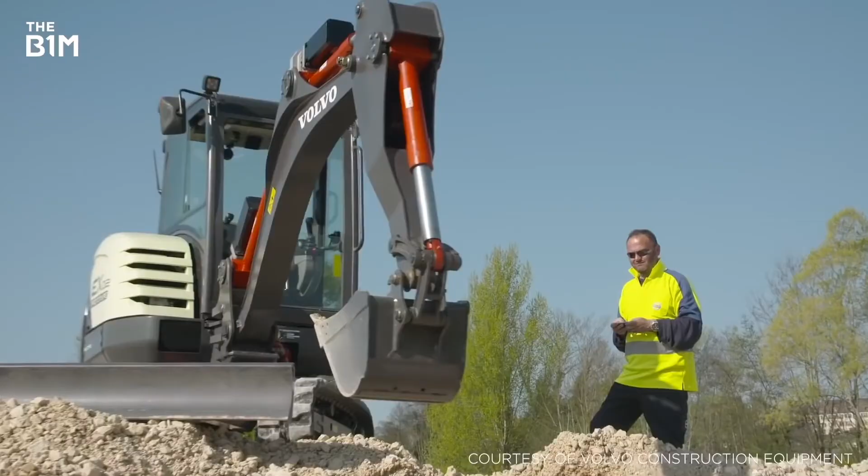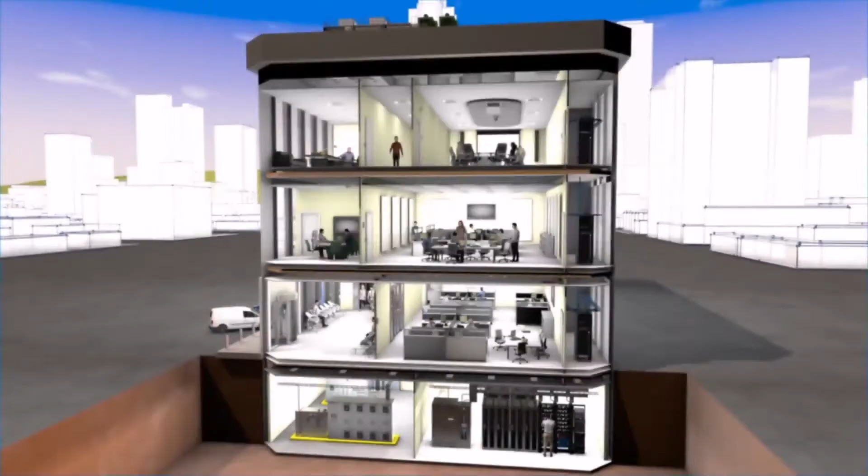Nowadays, digital technologies are changing the construction industry. The applications of technologies such as building information modeling, drones, laser scanners, and augmented reality are making the construction industry more and more data intensive. Also, evolving building systems, such as building automation systems, computerized maintenance management systems, and building energy management systems, are generating valuable data every day, every hour, or even every minute. With all this valuable data and machine learning techniques, we can uncover hidden insights and develop new knowledge for construction engineering and management.

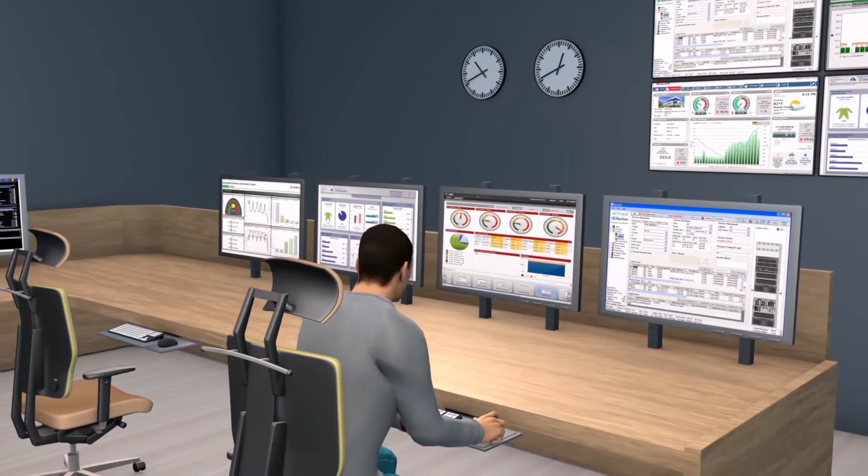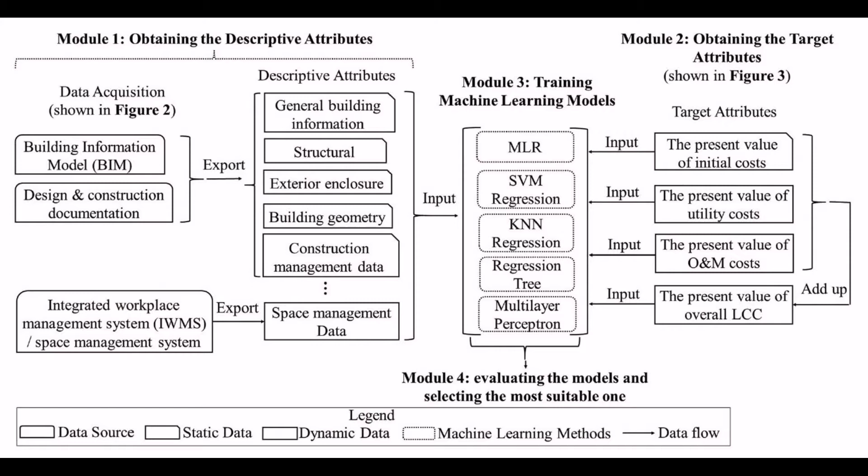One example of machine learning application in construction is a research study I conducted in the past 2 years. In this research, we investigated the feasibility of forecasting buildings' lifecycle costs by implementing machine learning on historical data. We proposed a comprehensive and generalizable framework for developing building lifecycle cost analysis machine learning models. This framework specifies the data requirements, methods, and expected results in each step of the model development process.

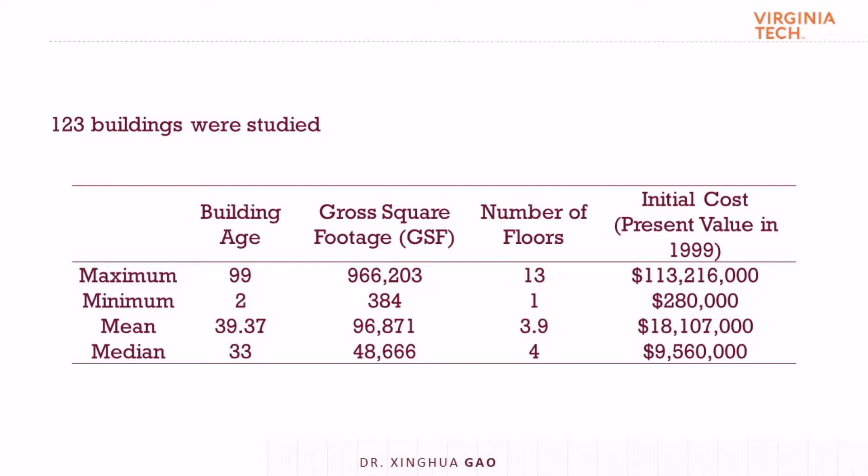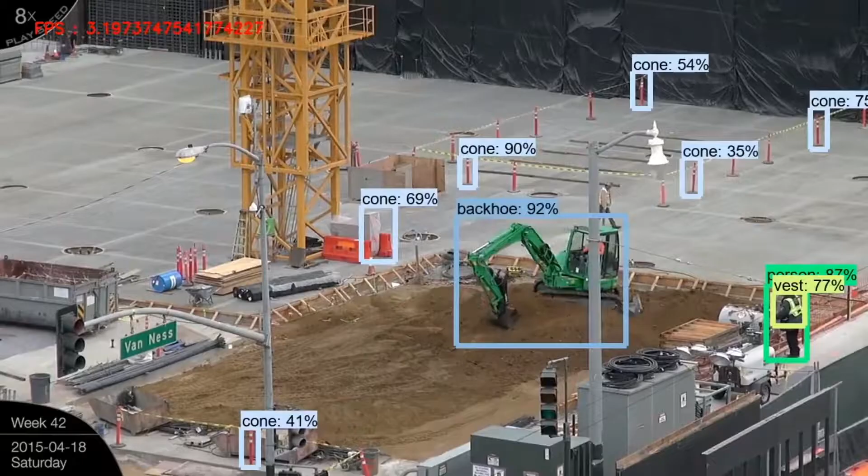We conducted a case study to test and evaluate the framework in a university. We collected the initial construction cost data, utility consumption data, and operation and maintenance data, and then developed a series of machine learning models based on this data to predict the lifecycle costs of existing buildings and new buildings of this university. There are many other applications of machine learning in construction. I would be more than happy to discuss them with you.

Another research I'm conducting is Internet of Things enabled and data-driven decision makings for the welfare of vulnerable population. Internet of Things, or IoT, is a system of interrelated computing devices, mechanical and digital machines, provided with the ability to transfer data over a network without requiring human-to-human or human-to-computer interaction. Examples of commercialized IoT devices in the building sector are the Google Home products and Amazon Alexa smart home products.

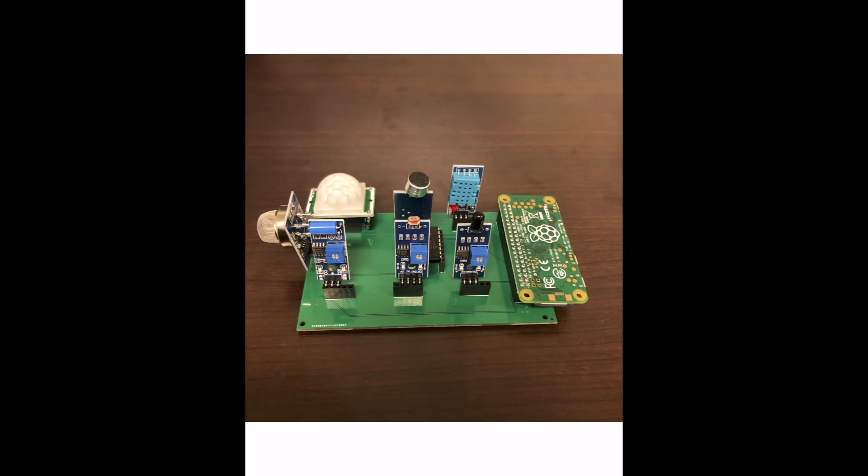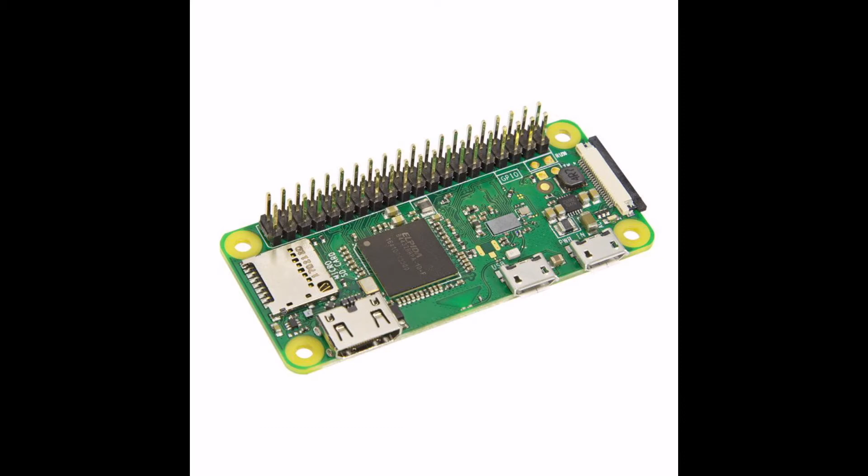Together with Dr. Na Meng at the Computer Science Department and Dr. Angelos Stavrou at the Electrical and Computer Engineering Department, I'm developing a low-cost, portable, and scalable IoT system for indoor environment sensing. I use the mini-computer Raspberry Pi as a distributed sensing station. It has a Linux-based operating system, independent CPU, memory, and Wi-Fi module. Installed with sensor modules, the Raspberry Pi stations can collect a lot of data, such as temperature, humidity, illumination, vibration, sound, motion, and all kinds of gas.

The data collected by these stations will be transferred through the internet and saved on a cloud-based central server. These real-time indoor environment data are the foundation for smart building research and applications. We can apply machine learning with this data and provide suggestions for decision making. For example, with the historical data, machine learning models can predict your preferred temperature at each time of the day.

When would you like to open the windows? When do you eat your breakfast? How can you lower your electricity bill by automatically turning off the Wi-Fi router when you don't need it? And most importantly, machine learning models may be able to find out what you should or should not do for better health, all based on your own data.

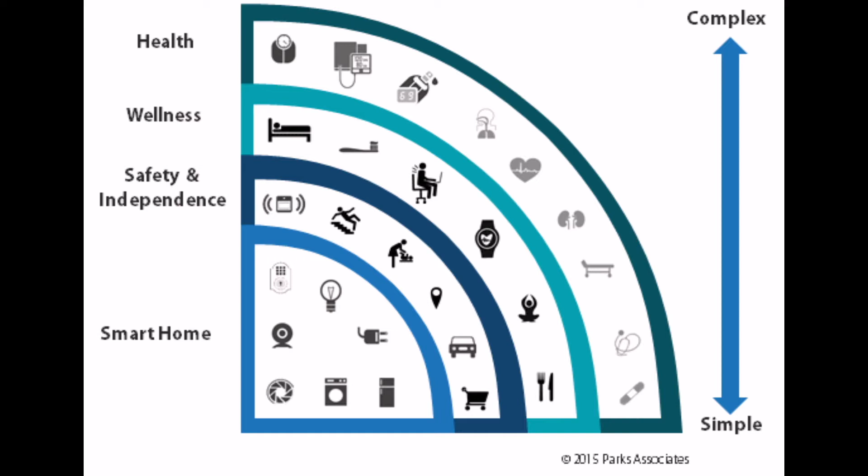Working with my colleagues at the Virginia Housing Research Center and the School of Building Construction, I'm conducting a series of research studies for improving the health and welfare of seniors using human building interaction methods with IoT and machine learning. We collect data that records how senior people interact with the buildings they live in and their preferences of building systems, and then analyze the data and try to identify the unique requirements of seniors.

In the near future, my research will extend to the domain of cyber-physical security for smart buildings. Because of the increasing amount of valuable data and automated analysis, smart buildings and their occupants are more and more exposed to the danger of data leaking, privacy invasion, and even physical stress caused by compromised cybersecurity. I'm currently conducting some preliminary research and building a team for this project.

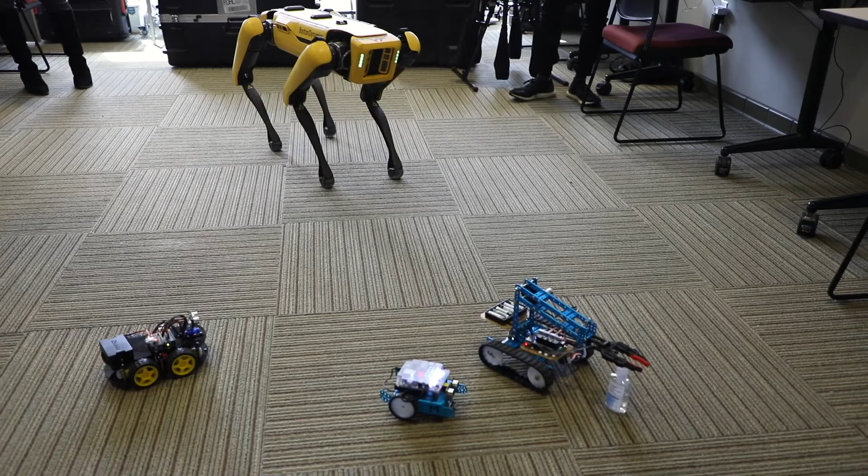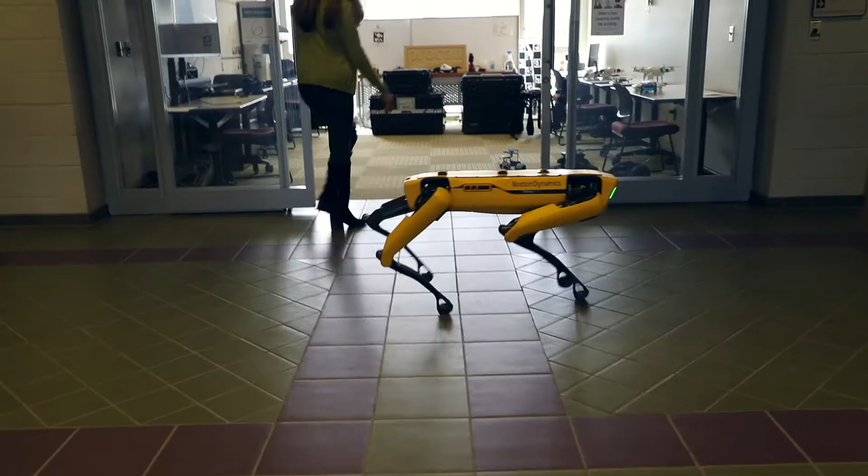My name is Kereshmeh Afsari, and I'm the Managing Director of the Arcade Lab. Arcade stands for Automation and Robotics in Construction and Design Engineering. I run the Arcade Lab with two of my colleagues, Dr. Nazila and Dr. Gao. We are focused on robotics and automation technologies in construction, as well as smart buildings and new technologies for education, new technologies for human safety and trainings.

We have a construction robotics team that is established through a fund from the Office of Undergraduate Research at Virginia Tech. The purpose of construction robotics is for undergraduate students to get involved with research during their education and get involved with new discoveries and technologies. Every undergraduate student in the Arcade Lab is paired with a senior student, like a graduate student, so that they can receive mentorship from the faculty as well as senior graduate students during their work in the lab.

My name is Mao Dong, and I'm a junior undergraduate international student majoring in construction engineering and management. Currently, I'm a member of the construction robotics team, and I'm working on robotics in construction education. Those robots on the table are the robots that I work with, and I use them to learn either coding or the autonomous feature of cars.

Hopefully I can apply them in construction education in the future. My goal is to determine whether they can be involved in construction education, and hopefully I can build a prototype in the next year.

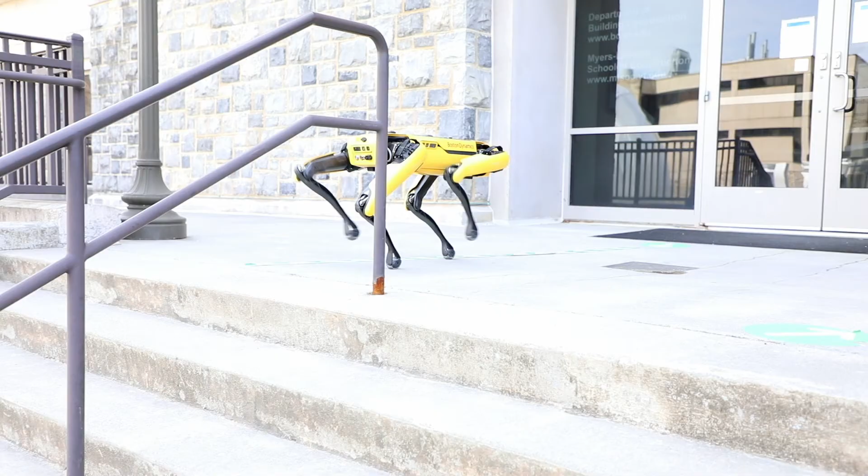Okay, I am now going to turn it over to Bola and let her talk about the research that she's doing. Thank you, and thank you for the opportunity to share my research with you. I will just briefly talk about my research work and what I'm doing. Okay, so I think I'm already sharing my screen.

My name is Omobolanle Ogunseju. You can call me Bola, and I'm a second year PhD student at the Myers Lawson School of Construction. My dissertation is on developing holographic learning environments where students in construction can learn how to use different sensing technologies like laser scanner, drone, IMU, RFID, GPS. Some of these sensors have been mentioned in the video you watched.

Although I work on some other research with my advisor, that includes robotics, testing the efficacy of exoskeletons for construction activities, digital twins, cyber physical systems for workforce training, and deep learning for learning, automating construction, and learning how the construction process is and how to automate construction processes.

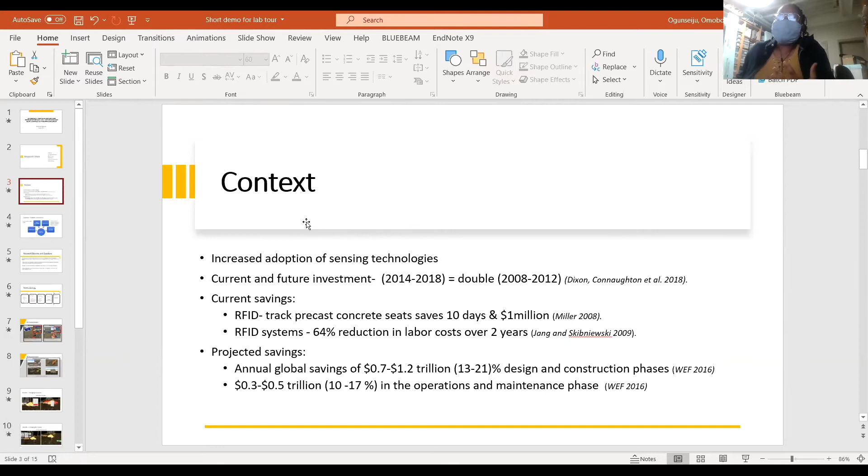Imagine using the RFID and saving about $1 million and 10 days. So this is actually triggering different institutions to incorporate sensing technologies into their curriculum.

However, most of these sensors are costly. For example, the laser scanner costs about $35,000 to $200,000, and most of the time, for students to learn how to use sensing technologies, they have to go to a job site. We know there are difficulties in taking students to the job site, like safety concerns—you have to wear safety glasses, helmet—and even schedule constraints. Sometimes the weather is not even good and conducive, and there are so many issues like that.

So why mixed reality? Mixed reality provides an affordable, hazard-free, shareable space. Students can learn how to use sensors right in the comfort of their classrooms. They can actually share knowledge together with their colleagues by working as a group, wearing the HoloLens, for example, or maybe wearing a VR headset.

It also helps to situate students in learning. There have been so many benefits that different studies have stated in literature. So this is just the objective of the research.

First of all, we wanted to know the core competencies—why sensing technologies are needed, and what is required to be taught to these students. For example, if you talk about laser scanners, what are the important concepts that students should learn and bring to the job site? That's the first objective.

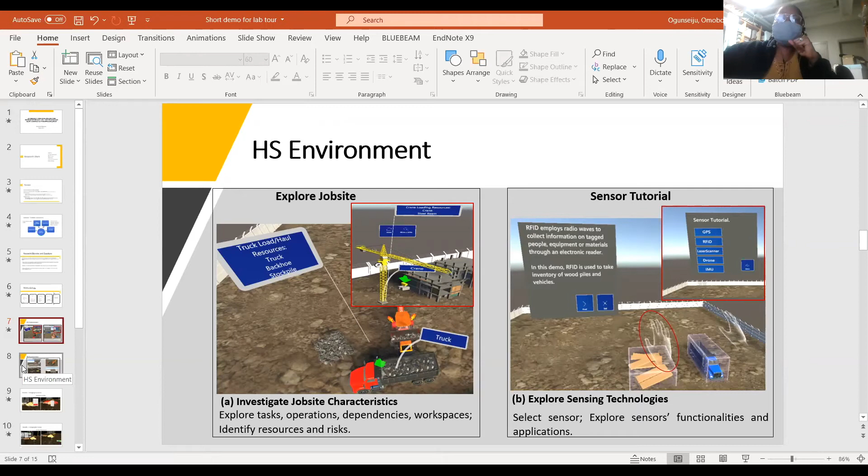In the sensor tutorial scene, we guide and scaffold their knowledge on how to use these different sensors. After they've been grounded in understanding different sensors, they go to the implementation scene, where they implement the sensors they've learned in this environment to track different construction issues.

For example, you can use the drone for job site inspection, or maybe for safety inspection, sanitation, or progress of work. You can use the GPS to track a dozer's productivity when backfilling. And another example is using the laser scanner to scan the existing conditions of a whole building for renovation purposes.

So we can see this is a whole building. They want to renovate it, but you really want to first get the plan of the building. Because the building is old, most of the time you may not have access to these plans. Even if you have access to it, things might have changed. The existing conditions might be different from what we had in the drawing when the building was built.

So these are different examples of how the different virtual sensors are implemented on the job site, on the construction site, in the mixed reality environment. Let me just quickly show you.

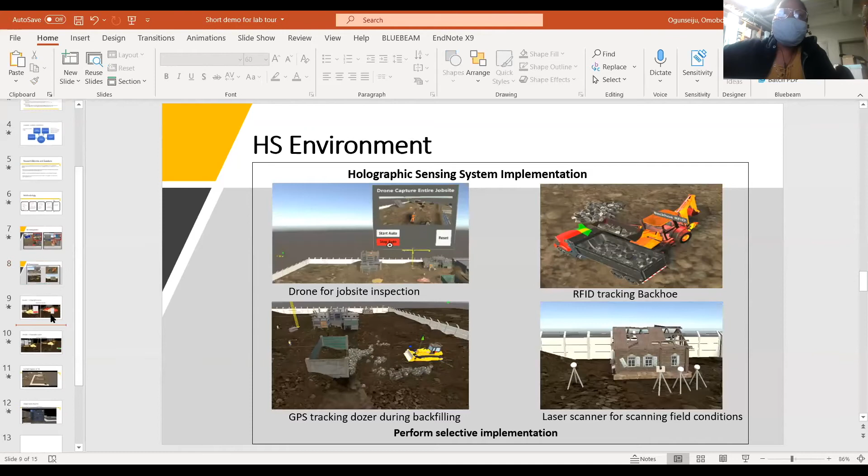We wanted to know how the construction site is reflective of a true job site. We also wanted to know if the represented activities are reflective of how sensors are being used on the job site, and also the layout of the job site.

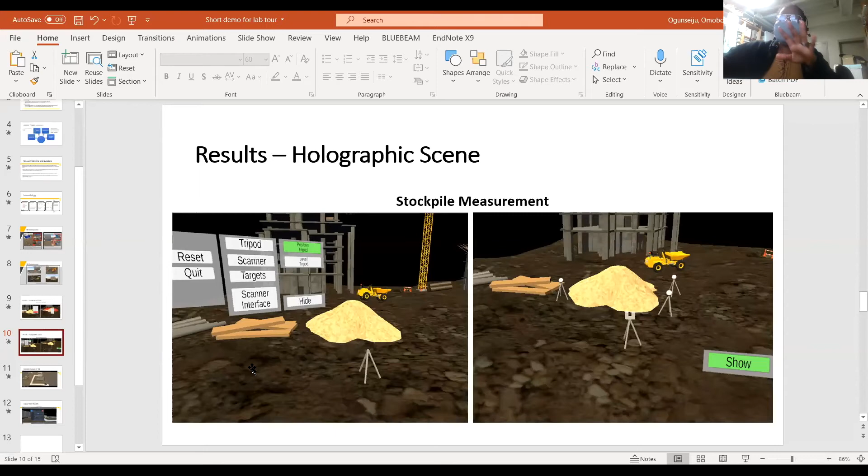After the learnability studies, and implementing the feedback from them, the job site has changed. As you can see here, now we have backfilling going on here, and we have a staging area for the materials.

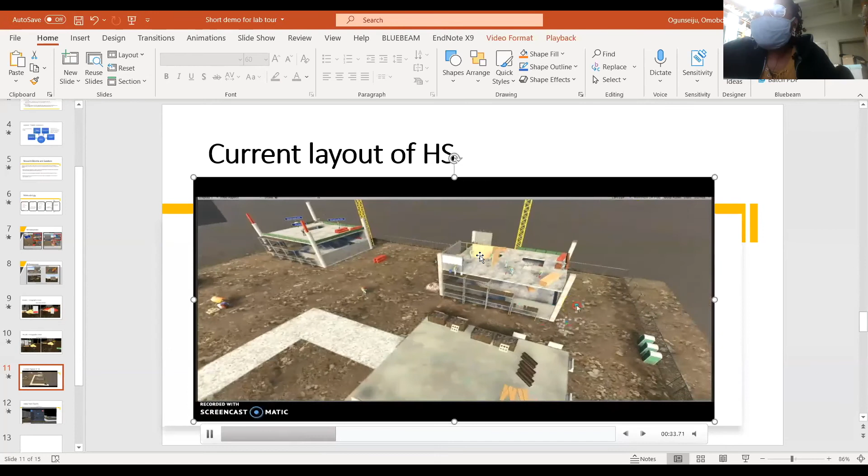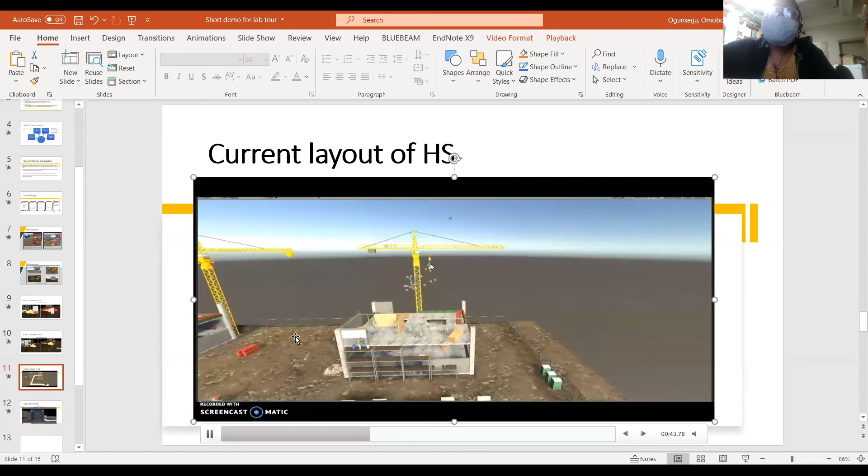Over here, we have a building. You can see some workers are working - this is a painter, a drywaller over there, a carpenter. We have toilets on our job site. We have two cranes, one for each building. This is for the first crane.

Let me show you this. Okay, this is a close-up view of what's going on at that building. Here on this building, we have an inspector with an RFID tag. We have a worker over here, and the worker will be moving along this edge.

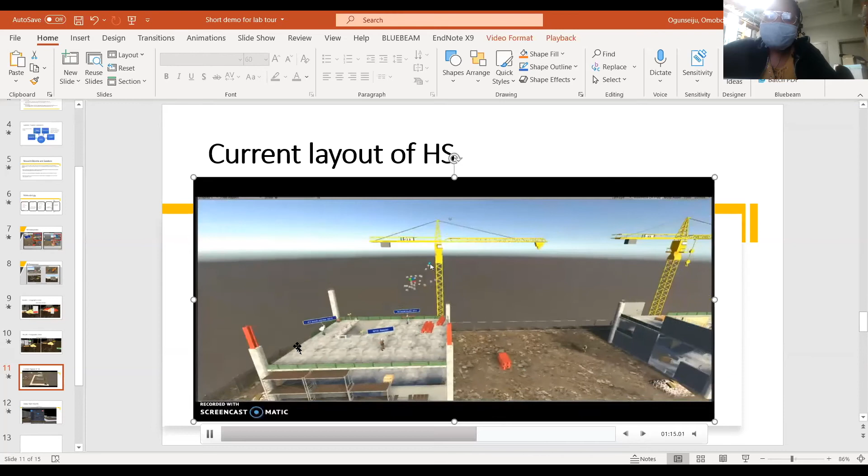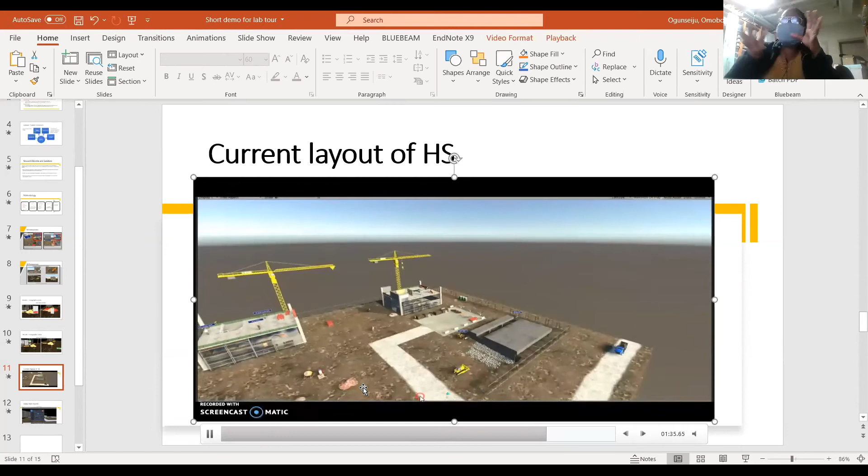We actually embedded different safety risks in the environment. For example, at the building on the left, the worker can fall off. We have a worker moving around the truckload and all, which I will show in my next video. The idea of putting all this in the environment is also to stimulate the learning process of the students, to help them recognize safety hazards on the job site.

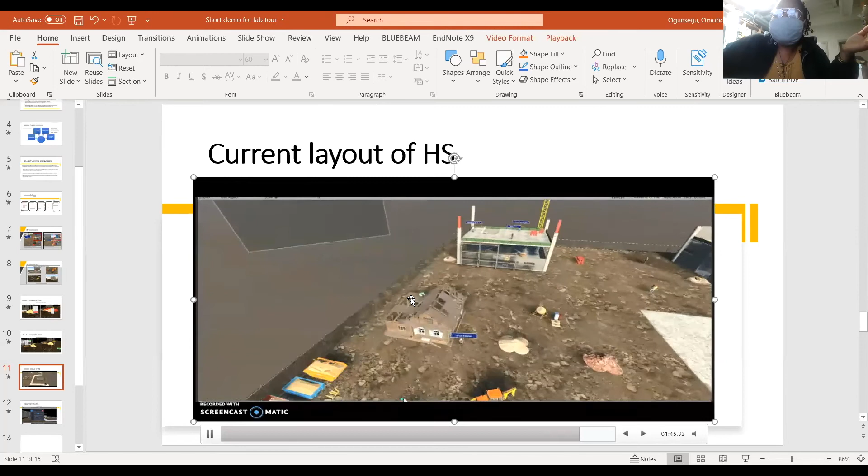You can see a roofer over here, and the roofer is not properly equipped. They could actually fall off the roof. So let me go to my next video. I just did a screen recording.

Just to show you a better view of one of the recent developments. You can see the backfilling going on here. You can see the worker here is, as they call it, caught in between - this is a safety hazard. It's actually in between two working vehicles, and it's very dangerous, right? Because the backhoe can actually hit him without knowing.

So we also have this vehicle delivering materials to the job site. Backfilling is going on here. If you move closer, okay, yeah, backfilling is going on here.

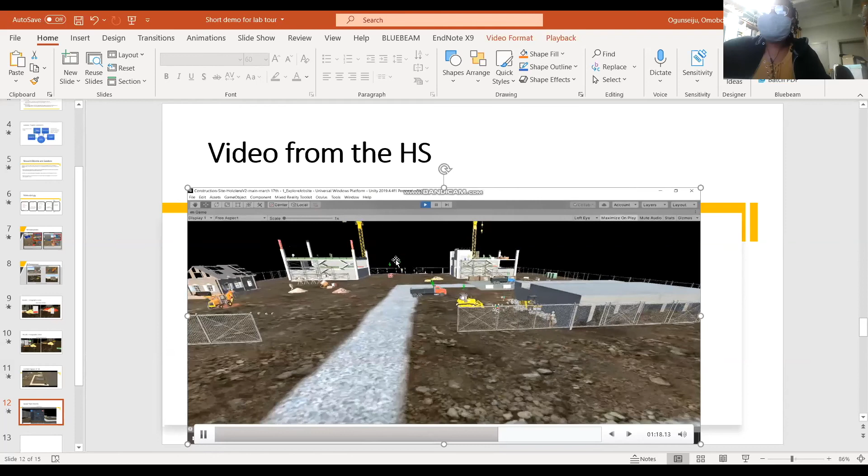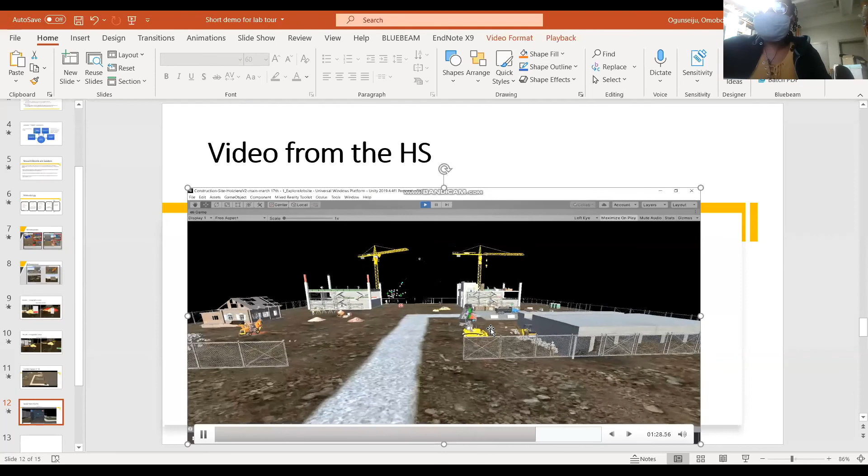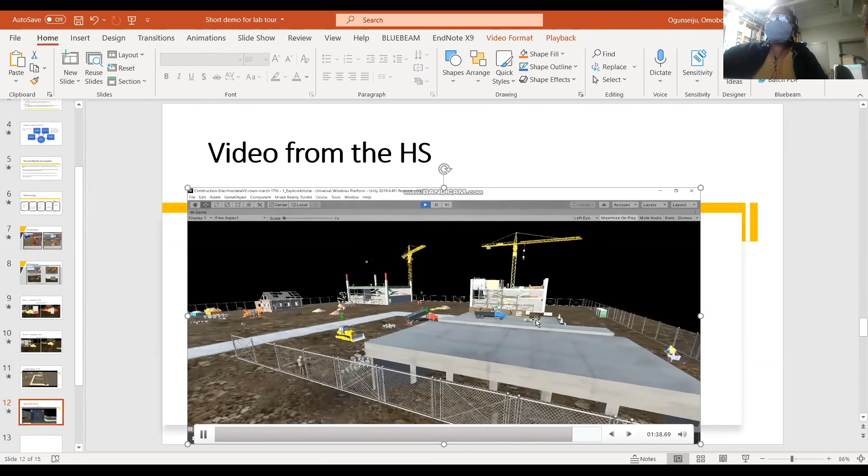Over this building, we have the crane going on, loading a steel beam from the ground to the top of this building. So this is the recent development of the environment. I know you can't really see much here, but it's a really interesting environment with so many construction concepts embedded in it. Right now we are testing the usability of the environment to know some of the issues users can encounter when using it to learn sensing technologies.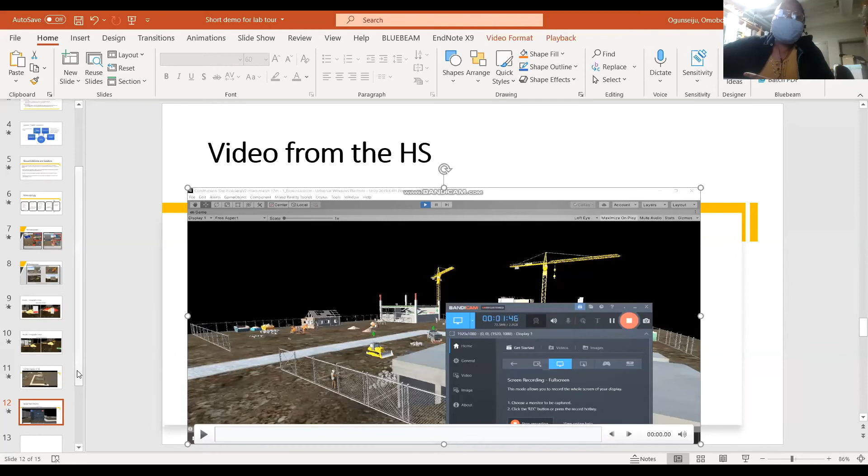Okay, so just this is a brief results from the exoskeleton research, which is another research I'm working on with my advisor. I don't have a picture of the exoskeleton now, but there were some shown in the video you saw.

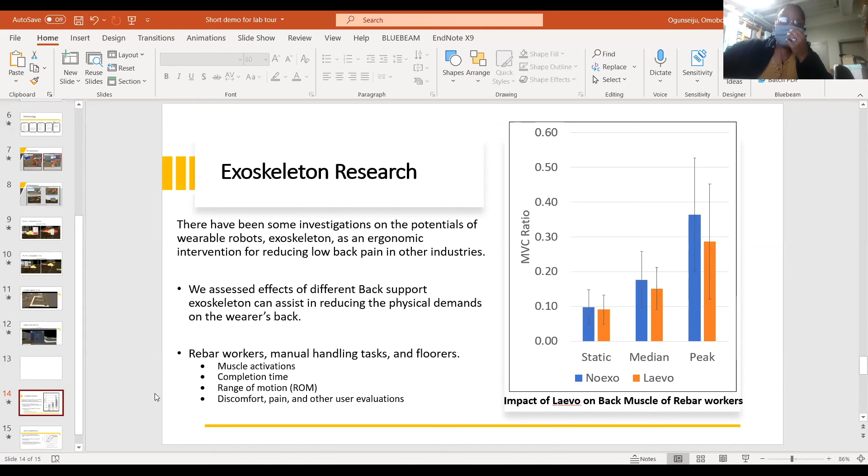So we showed how exoskeletons can actually help workers. This is a result showing that exoskeletons can help reduce physical demand on workers' backs. You can see that with the exoskeleton, which is the orange bar, there was a reduction in the stress on the workers' back. Let me show you another result from another of our research.